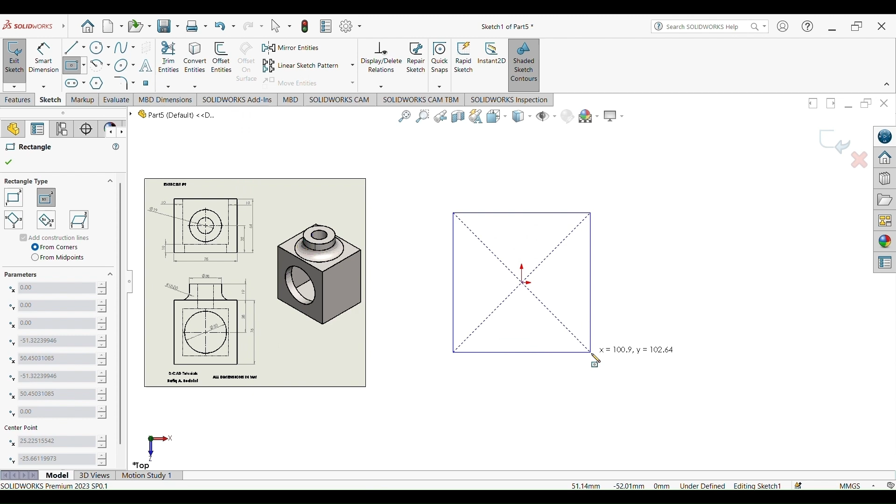We start by selecting top plane, sketch, select center rectangle, we draw one rectangle, select smart dimension. The dimension of this rectangle here is 75 by 64. So this is 75 millimeters, while this side right here is 64 millimeters.

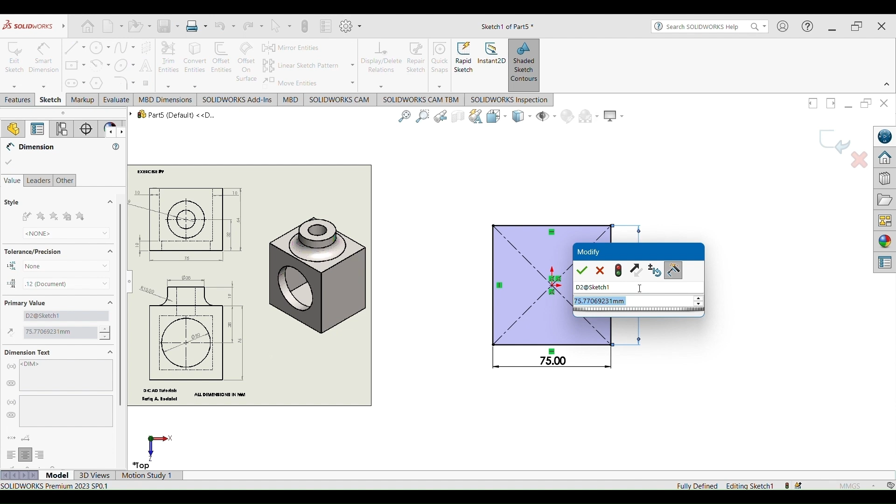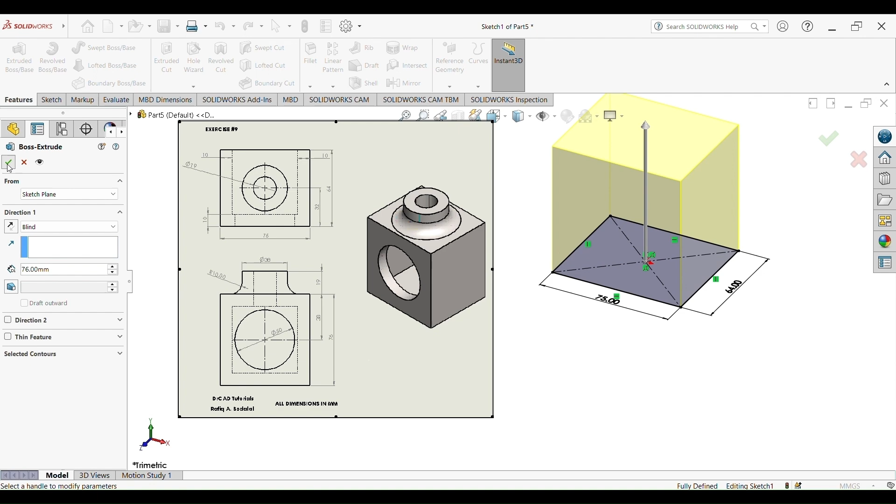We go to features, extrude boss base. We're going to extrude this to an overall height of 76, as you can see here, 76 millimeters. Okay. Step 2 is to create the cylindrical part right here. So select this surface, sketch. We draw one circle here at the center.

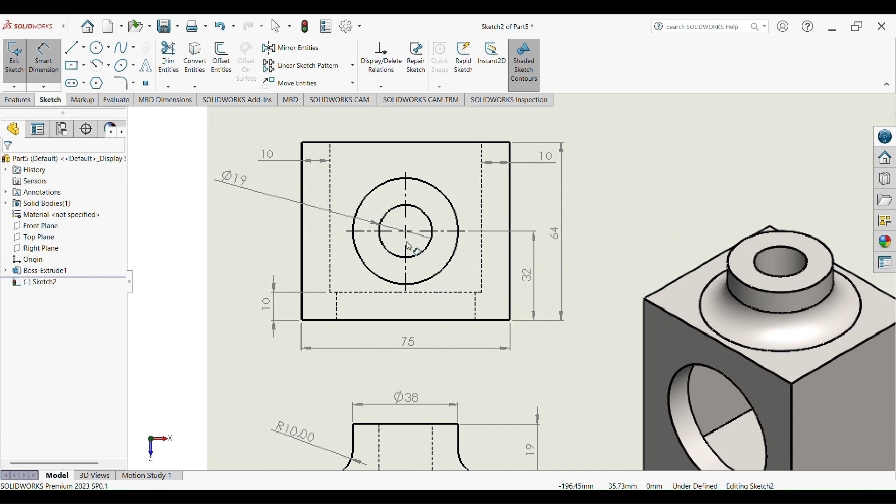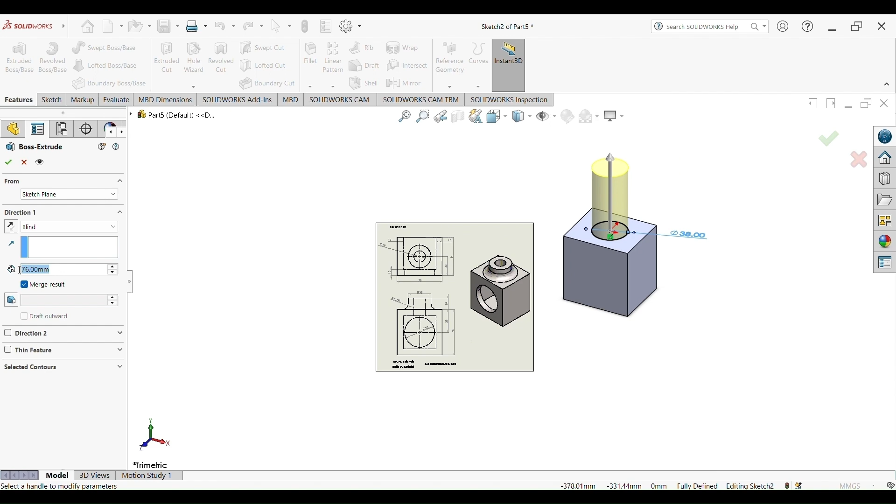And this cylindrical part right here has a diameter of 38 millimeters. So this is 38 millimeters. Go to features, extruded boss base, and we're going to extrude this to a height of 19 millimeters. Okay, so here, right, 19.

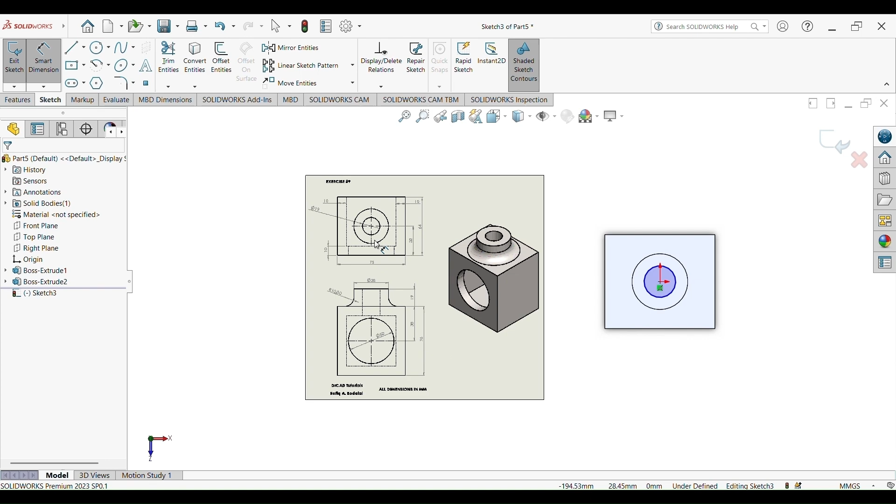We now create the opening here at the top. So we select this face, sketch. We draw one circle. Use a smart dimension, and the diameter of this opening here at the top is 19 millimeters. So this is 19. Okay. We go to features, extrude cut, or rather we're going to leave this extrusion for last, okay? We're going to delete this circle.

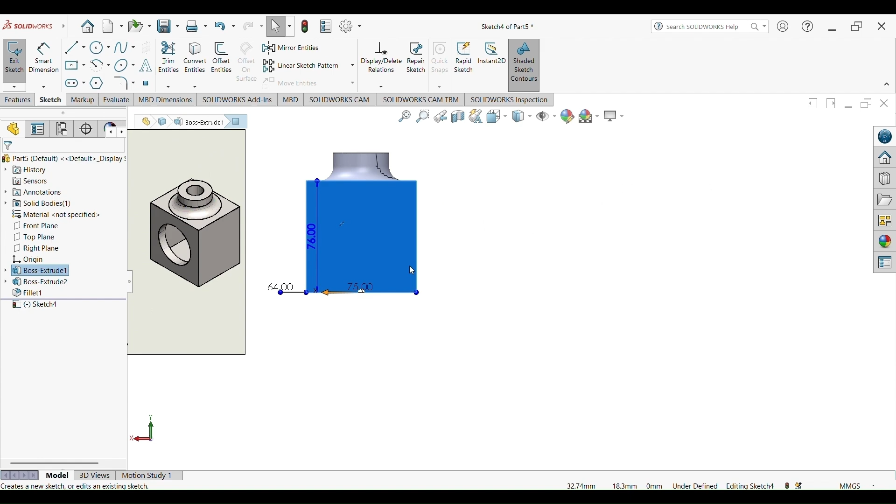Let's work on the fillet right here. So we're going to exit sketch, go to features, fillet, select this edge right here. And we're going to use a fillet radius of 10 millimeters. Select OK. We go to the back of the component, select this face, sketch. We're now going to create the square opening here at the back. So select center rectangle, and we're going to draw one rectangle like this.

Go to Smart Dimensions. Okay, so this square, the distance between this edge and this edge is 10 millimeters. This gap also has a length of 10 millimeters. This is also 10. And this is 10 as well.

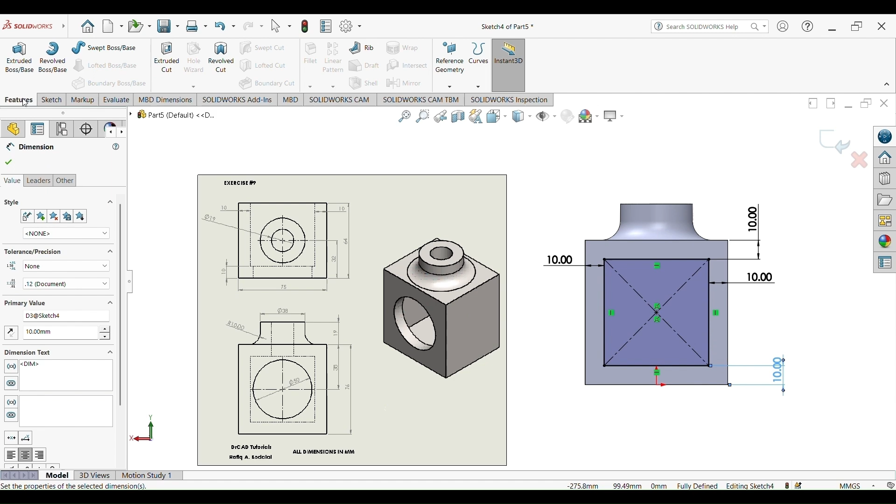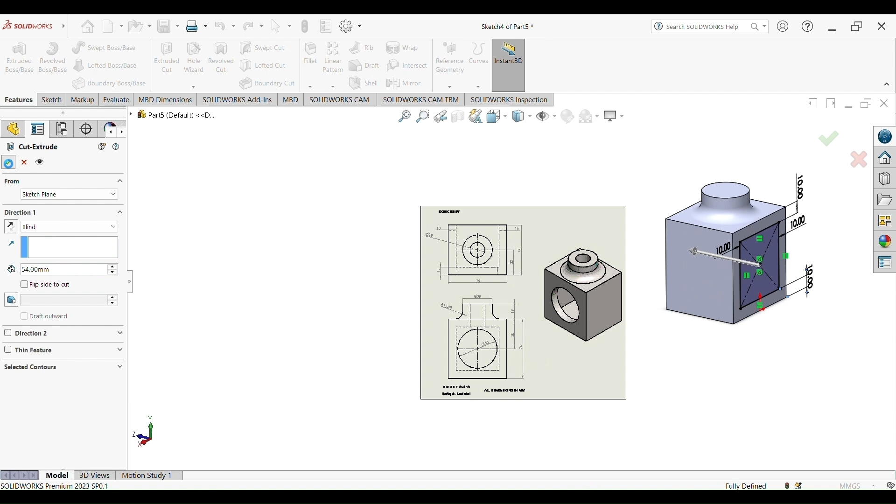Go to Features, Extrude Cut, and we're going to cut this to a depth of 64 minus 10, which is 54. So go blind and write 54 millimeters. We create this opening here.

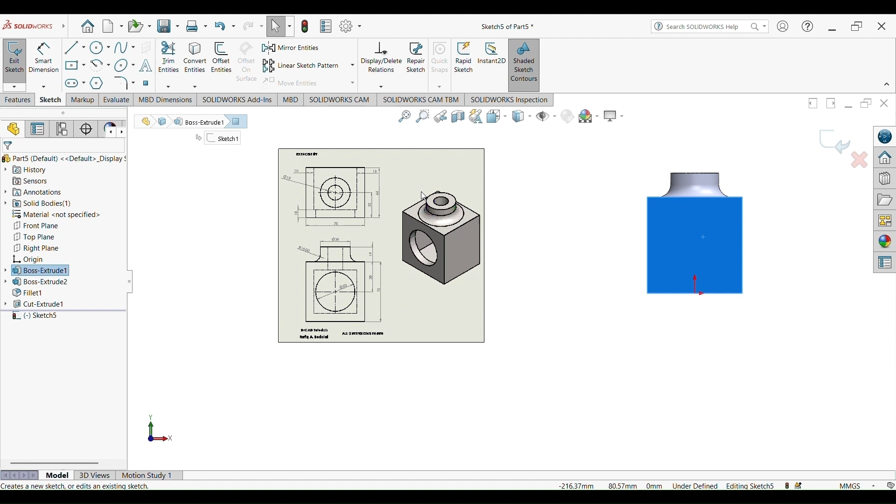We now create the opening here at the front. So select this face, sketch, use circle. We draw one circle. Select Smart Dimension. The distance between this edge and the center of this circle is 38 millimeters. As you can see here, 38. While the diameter of the circle is 50 millimeters.

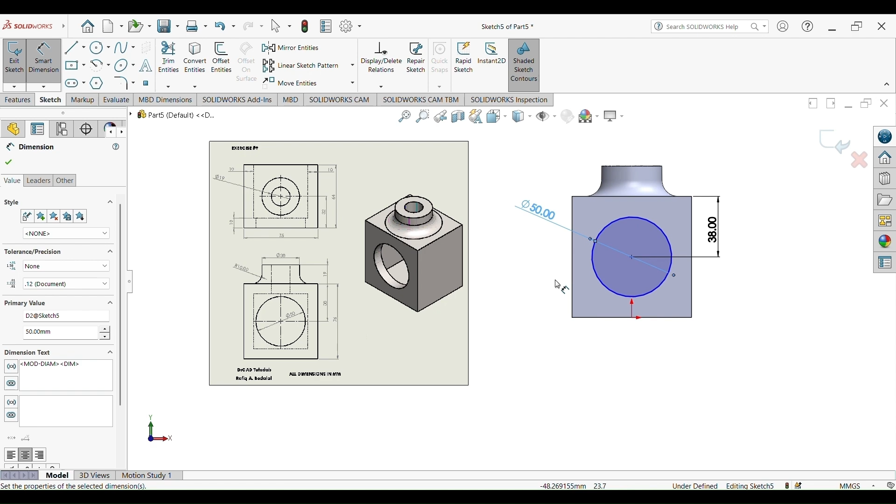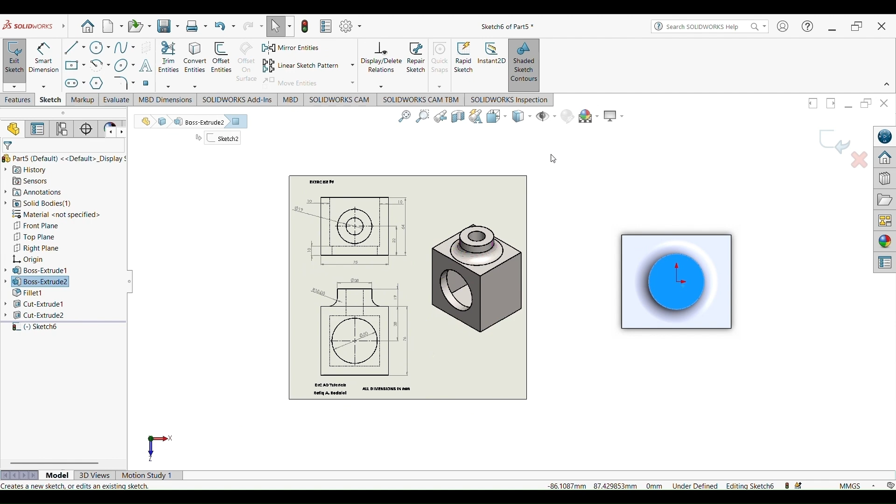Okay, go to Features again, Extrude Cut. We're going to extrude this up to surface, this surface right here. Select OK. Finally, the opening here at the top, we select this surface, sketch. We draw one circle here. The diameter of the circle is 19 millimeters. So use Smart Dimension. This is 19.